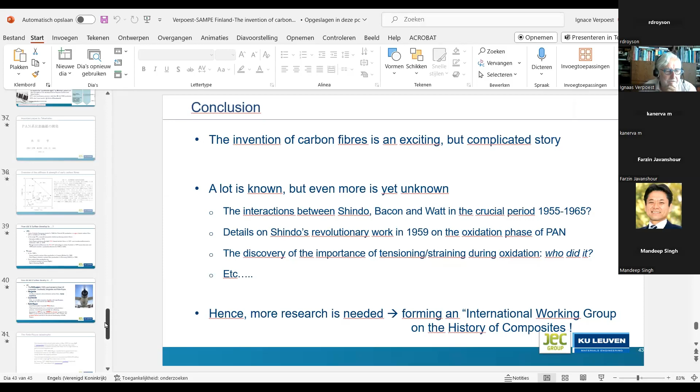Do you see the full screen now? Yes, we can. Everything is okay.

The title of the first part of my lecture is The Invention of Carbon Fibers, an Exciting History Asking for Further Exploration.

On the website of JEC World, the URL is shown at the bottom of the slides, you can see a kind of timeline for the development, or the history, of composites, which was made when I wrote this booklet on the history of composites. Two volumes have now been published by JEC World, and you can find an online version of those two booklets on the same website shown below.

I'll be very brief, just glancing over the history of composites until carbon fibers were invented. Long before our time, before the time of the Egyptians and Romans, we see that the composite concept already existed: reinforcing bricks with straw, impregnating papyrus fibers with a kind of asphalt.

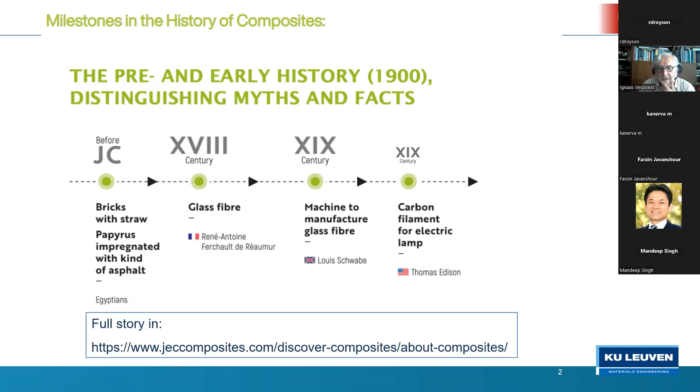The first moment we read about carbon filaments for electric lamps is linked to Edison, but I'll come back to that at the end of the 19th century. I'll show that, in fact, already before Edison, some people had the idea of making carbon filaments.

Then in the 20th century we have the invention of the first man-made resin, phenolic resin, by a Belgian guy, Leo Baekeland, who at that moment worked in the US. Two of his collaborators then filed a patent six years later, which, as far as I could reconstruct, is the first patent defining the concept of a composite material—namely a polymer, in their case phenolic resin, reinforced with textiles, initially linen textiles.

Even more surprising, already more than 100 years ago, in 1916, there was a very interesting patent describing the construction of an airplane fully built out of composite materials, as described by Robert Kemp in his patent. More details can be found in the booklet I wrote for JEC, on the JEC website.

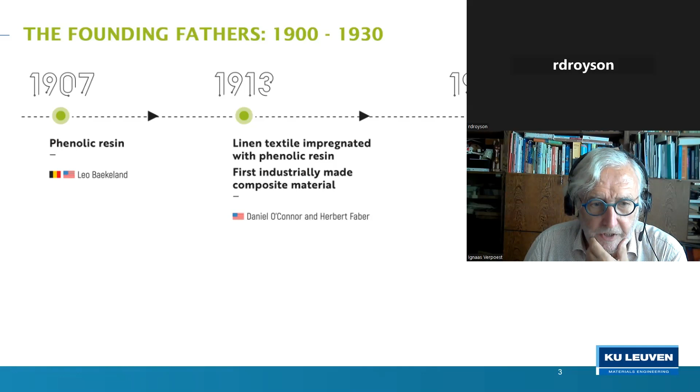Then in the 1930s we have three important inventions. Polyester was invented in the early 1930s, epoxy resins a couple of years later, and then the first production of continuous glass fibers usable for reinforcement of composites was done by Slayter Games in the US, a collaborator of Owens Corning, in 1938.

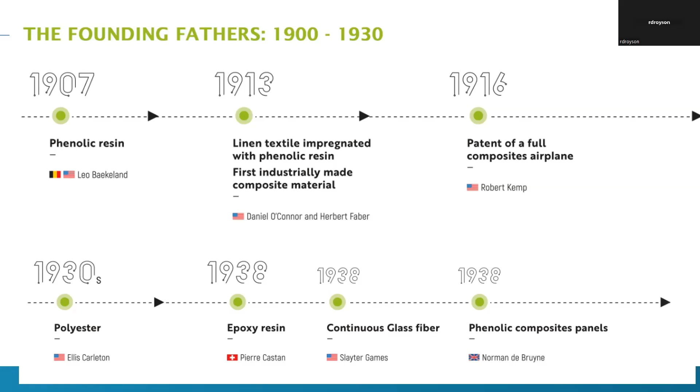At the same time, in the UK, Norman de Bruyne was making the first composites using phenolic resins, but with natural fibers. Then came the Second World War and the period after, where we see a strong development of glass fiber reinforced plastics for airplane components.

The manufacturing concepts of filament winding and pultrusion were already invented at that time. The first sports applications came with surfboards, the first automotive applications, and the first full aerospace applications—gliders—also appeared in the 1950s.

Then we come to what I call the second materials breakthrough, after the first one in the 1930s, which is related to carbon fibers. I'll come back to this scheme in a minute.

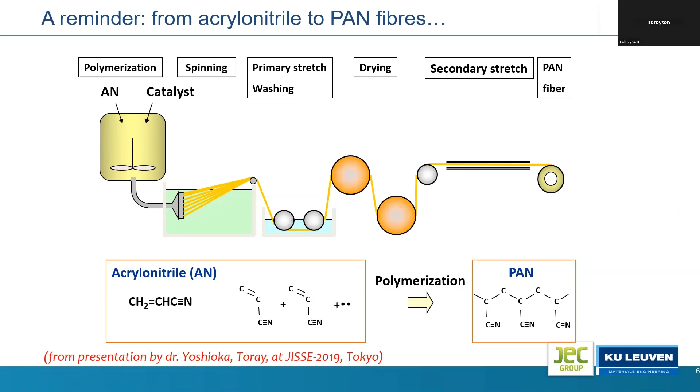Just to remind you how we make carbon fibers: at this moment, 95% or even 98% of all carbon fibers produced worldwide start from polyacrylonitrile. First we polymerize acrylonitrile, spin the fibers, stretch them a first time, dry them, and then stretch them a second time. This stretching is needed to achieve a kind of molecular orientation in the PAN fibers.

Then these PAN fibers go through the oxidation and carbonization process. If we want even more perfect carbon content, sometimes up to 99.9%, we add a graphitization process as well. Finally, a surface treatment protects the fibers and also improves adhesion with the matrix later on in a composite.

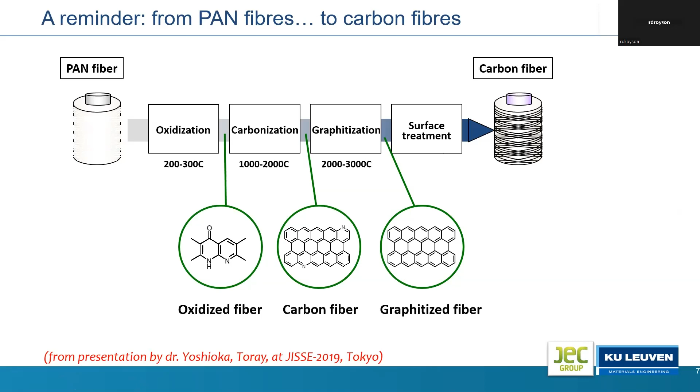Now, the question is, who invented the first carbon fibers? I already referred to Edison, but in fact, almost 40 years before Edison, there was a UK guy, Frederick de Moleyns. He was of French origin, and he had the first patent where he used powdered charcoal, which he heated between two platinum wires, and the charcoal started glowing and made light.

Joseph Swan then added two things. First, he was using a filament of carbonized paper, and second, he was doing that in an evacuated glass bulb, creating a kind of vacuum which would improve the durability of his invention.

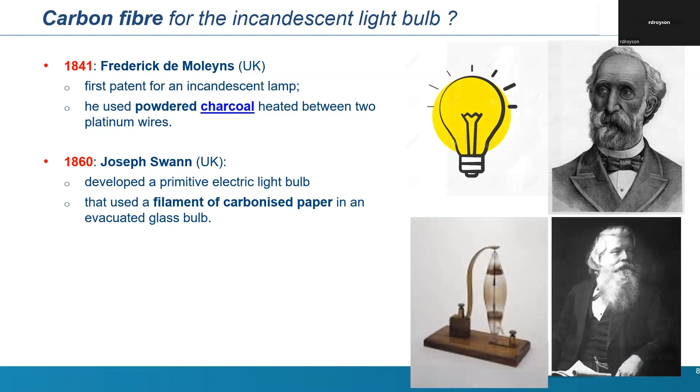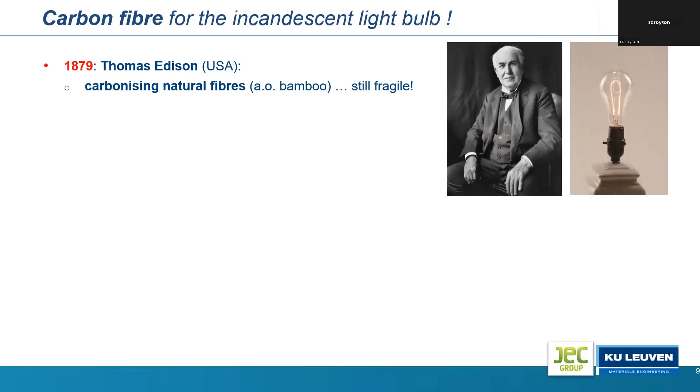Then comes Edison, and what Edison has done is bring this to an industrial level. He was not doing the initial invention, but he brought it to an industrial level by carbonizing natural fibers, amongst others bamboo. The problem was that these were still rather fragile, and it's interesting to see that Lewis Latimer,

he was the son of an African slave, was working as a technician for other inventors, amongst others in the group of Thomas Edison. He made a very big step forward in developing a more reliable carbon filament, because all these carbon filaments were very brittle, and he encapsulated it in cardboard. Again, I refer to my booklet on the JEC website for more details on this.

Unfortunately, by the beginning of the 20th century, this invention became obsolete because tungsten wires were then used in glass bulbs for making light. Then we go 70 years further. In between those 70 years there was a lot of research on carbon, but not so much about carbon fibers.

The first signs toward carbon fibers happened in the 1950s, where again natural fibers, amongst others cotton fibers but also rayon fibers, were used as filaments to replace tungsten. So they wanted to go back to the original idea of using carbon fibers, but this time in vacuum tube power amplifiers.

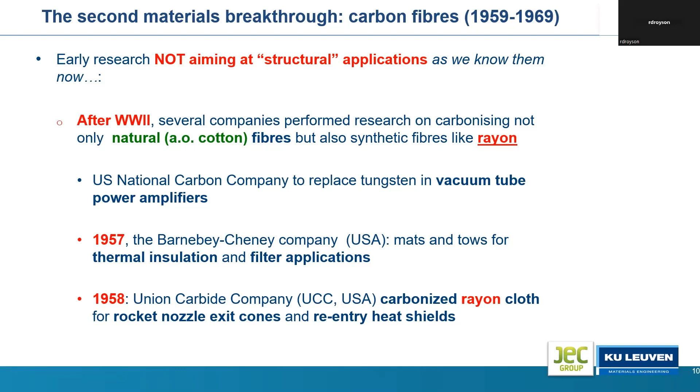So all these things were not really aiming at mechanical or structural applications, except maybe the last one, but that was again mainly for thermal reasons that these carbonous materials were used.

The first person who really looked for fiber-like materials was Roger Bacon, again at the Union Carbide Company Research Center, Parma Technical Center. He produced it by first sublimating carbon and then condensating it. Sublimation was realized by a high voltage arc between carbon rods, and then the sublimated carbon was condensated and formed a kind of fiber-like, on a nano level, fiber-like material.

Without going into detail, it's very exciting to read how they made a guess of the Young's modulus, reaching a Young's modulus of 700 gigapascal and an estimated tensile strength of 20,000 megapascal. At that moment, my understanding is that all of a sudden the carbon community started understanding that maybe the mechanical properties of these carbon fibers could become an interesting issue.

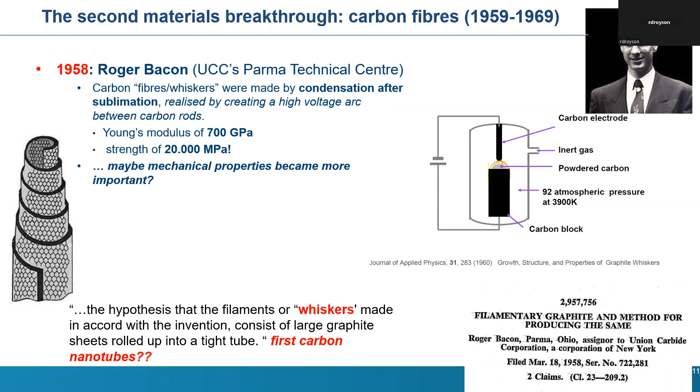You see here the patent of Roger Bacon. Some people claim that, in fact, these nanofibers of Roger Bacon, which were very short, can be considered as the first whiskers, carbon whiskers, and hence can be considered as the first carbon nanotubes, which in fact were only officially discovered in Japan in the 1990s.

A similar attempt to make carbon fibers, but now not carbon nanofibers like Bacon's, but real fibers which you can handle, was done by William Abbott at the Carbon Wool Corporation. He was carbonizing rayon fibers, but at very low temperatures, below 260 degrees. As a consequence, they were not really focusing on mechanical properties—the mechanical properties were very low and the carbon yield was only 50%, whereas now we reach much higher values.

So this is the development at Carbon Wool Corporation.

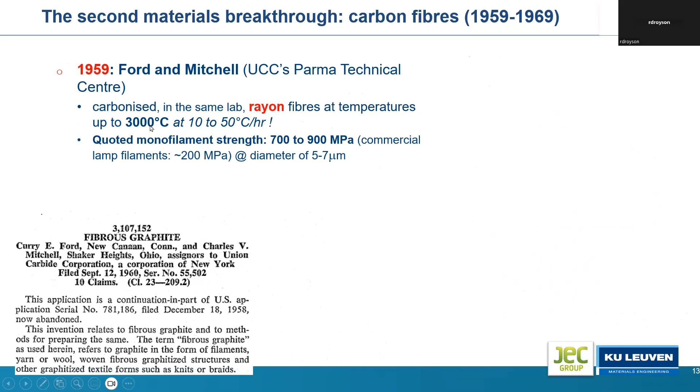Then we go back to Union Carbide, and in the same group as Bacon, Ford and Mitchell improved the previous approach of Abbott, who only was heating up the rayon fibers to 260 degrees. They were doing it up to 3000 degrees, and they were reaching monofilament strength of up to 900 megapascal.

The interesting thing in this research is that, as far as I could reconstruct, for the first time a link was made between the orientation of the graphitic layers in the carbon fibers and the mechanical properties. You see in the text that they measured this by X-ray diffraction, and they say a high degree of preferred orientation exists throughout the entire filament. It is believed that this high degree of uniformly oriented crystallinity in part accounts for the superior strength of the monofilament. So this is, as far as I could reconstruct, the first time this link was made between the structure of the graphitic layers and the high mechanical properties.

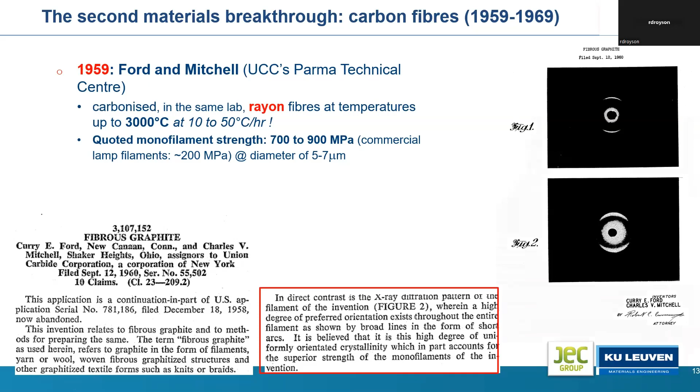Anyway, the American Chemical Society claims that the real inventor of carbon fibers should be considered Roger Bacon, with his carbon whiskers, and then later Leonard Singer, who started the commercialization—but I will come back to that. So we have carbon fibers. It was shown in America that they have interesting properties, but there was not at all any commercial production, and all these fibers were discontinuous fibers and so on.

And then comes Akio Shindo in Japan. He joined the Government Industrial Research Institute in Osaka in 1952 for studying carbon and, in fact, degradation of carbonous materials for nuclear reactors. He said that what he was interested in was development of industrial materials, not so much just the degradation of carbon fibers.

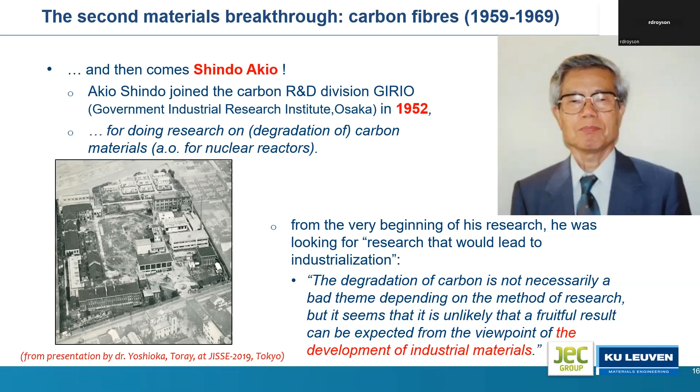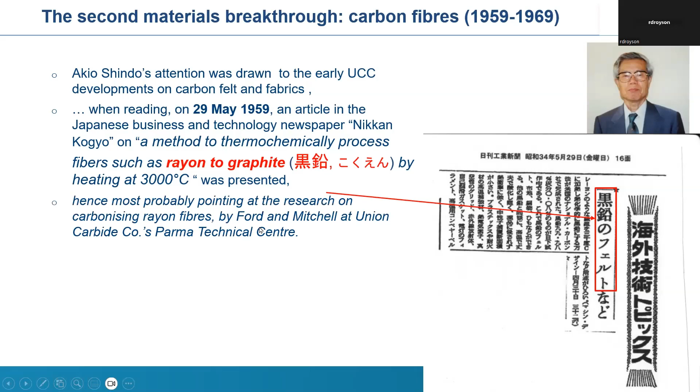Now, that story is for people who are interested in how science and technology develop, in fact a very interesting case. It's very well documented now by a lot of research in Japan that on May 29th, 1959, there was an article in a Japanese business and technology newspaper, Nikkan Kogyo, which referred to a method to thermochemically transform fibers such as rayon into graphite, kokuen as it's said in Japanese, by heating them to 3000 degrees. Here you see an image of that famous newspaper article of 1959. Because it refers explicitly to 3000 degrees C heating, my guess—though there is no solid proof—is that that article referred to carbonizing rayon fibers the way Ford and Mitchell had been doing it at Union Carbide.

This inspired Akio Shindo to refocus his research from degradation of carbon for nuclear applications to using polymeric precursors—maybe not rayon, but others—to make carbon fibers the way it was reported to have been done in the United States. Only three months later, and that's really amazing, he already filed his patent. For people who have been filing patents, and I have a few of them, this is an unbelievably short time—from the start of the idea of 'I could do that' until the filing of the patent, it took him only three months. I find this a textbook example of careful observation during experimental work that can lead to important scientific breakthroughs.

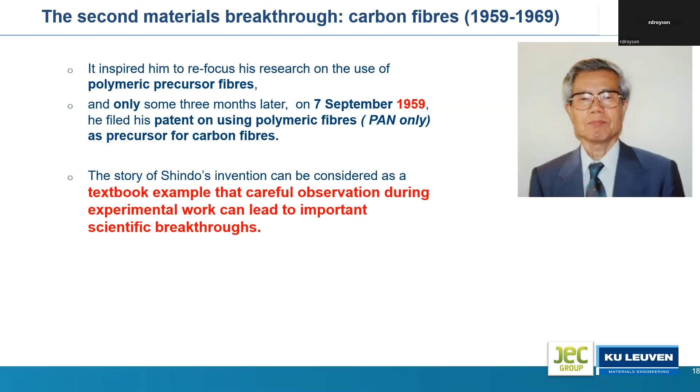And I will take a few minutes to take you through this invention of Shindo. He said, okay, I need good fibers, and I will try different types of polymeric fibers to make carbon fibers out of them. He finally ended up with DuPont's polyacrylonitrile fibers, the Orlon fibers. He took one single fiber and put it in a tube, flushed it with nitrogen to get rid of the oxygen as much as possible, heated it up to 1000 degrees, and after a few trials he had a non-brittle carbon fiber. He writes in his report: it did not fracture when you wind it around your finger.

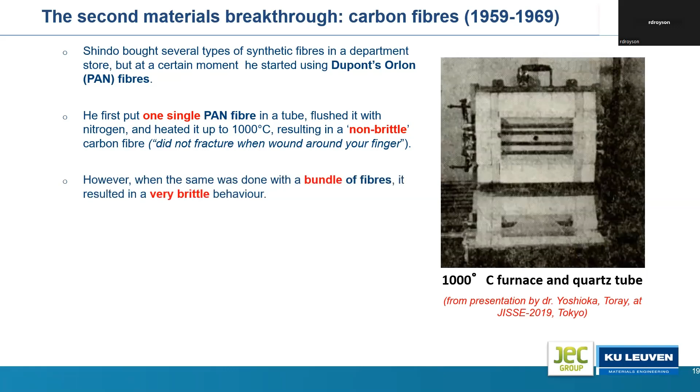Then he said, okay, one single fiber is not enough—let's take a bundle of fibers doing exactly the same thing. The bundle of fibers resulted in brittle behavior. So he started asking, why would that be? In his thinking, it could be related to the amount of oxygen remaining in the tube he had flushed with nitrogen. That amount of oxygen might have been sufficient to create a partial oxidation of the single PAN fiber, and hence stabilize it, because oxidation of polyacrylonitrile fibers results in thermal stabilization, making the fiber heat resistant so it can withstand higher temperatures for carbonization—whereas there was not enough oxidation, not enough oxygen available for oxidizing all the PAN fibers in a bundle. Hence he discovered that the oxidation process is the critical step in the production of carbon fibers.

And by this very careful observation of what happens during a simple experiment, he laid the basis for one of the most important material revolutions of the 20th century.

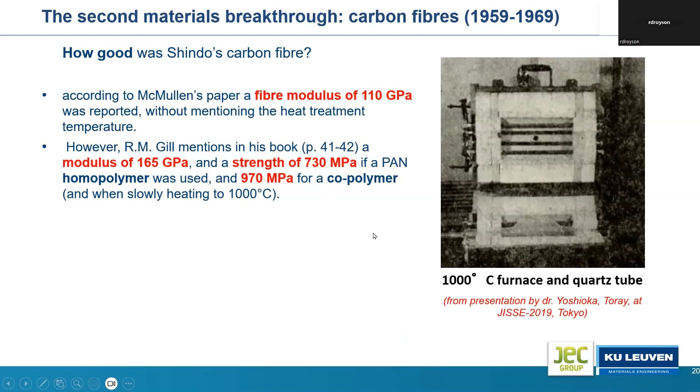Now, the question is, how good was Shindo's carbon fiber? Well, there are different sources and they contradict each other somewhat. Some talk about a fiber modulus of 110 gigapascal. R.M. Gill, in his book, mentioned 165 gigapascal and a strength which, depending on the type of polymer used, was between 700 and almost 1000 megapascal.

And then Johnson refers in a book by Watt that Shindo could increase the modulus of the carbon fiber from 110 to 160 gigapascal by increasing the carbonization temperature from 1000 to 2000 degrees C.

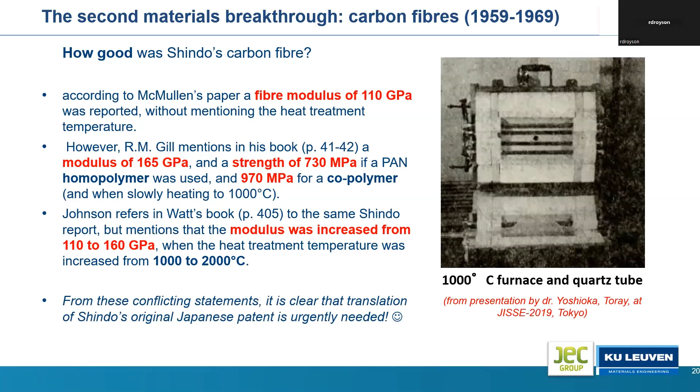I think we need, and I have in the meantime had some progress on that, a translation of the original Japanese patent. I now have it and will study it further.

Okay, how did it then go further? Well, we can say that Shindo's patent of 7 September 1959 was in fact the patent which created the way to make carbon fibers based on polyacrylonitrile fibers. He presented his results at a domestic conference in '59 and published his famous report in 1961, where he describes the whole process in quite some detail.

He also published several papers in Japanese journals, and he defended his PhD, which was translated into English. He then presented these results again two years later, in 1963, and you'll understand in a minute why 1963 is important. In 1963, he presented his invention at a conference of the American Carbon Society in the US.

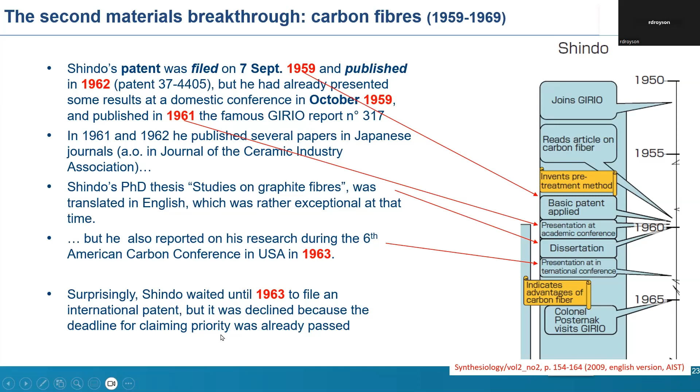So he also waited, but that's a small remark, until 1963 to file an international patent, but the priority date had already passed, so that was not accepted.

Anyway, we now have a way of making carbon fibers from PAN precursors, and the question is, what did other people in the US and in the UK do to invent or further improve that invention?

In the UK, it's very interesting that during a discussion in the Royal Society in London, William Watt mentioned to Tony Kelly, Sir Anthony Kelly, one of the big names in composites who died a couple of years ago, that he could make stiff graphite fibers. You can read this statement in a paper by Tony Kelly.

And they indeed started doing it, and they could reach stiff carbon fibers with stiffness up to 375 gigapascal by applying tension during the oxidative stabilization process of the PAN precursor — and that's important. They filed the patent in 1965, and here you see Phillips, Watt, and Johnson, the three co-inventors in the United Kingdom.

In the US, we have Roger Bacon, who, after his work on carbon whiskers, collaborated with his people at Union Carbide. They already started, also one year after the UK people, studying the effect of straining the fibers during processing, during the carbonization process. But they were still hooked on rayon-based carbon fibers.

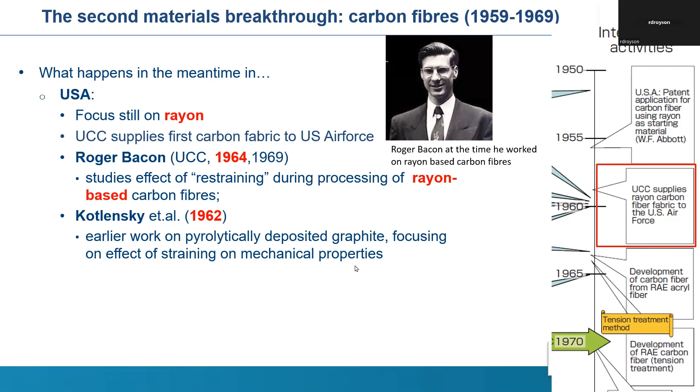Now, why is this so important? This is the second-to-last part of my presentation. We now know very well that the orientation of graphitic molecular units, and hence the higher mechanical properties, depends on that orientation — so orientation is very important for achieving high mechanical properties.

And this can be achieved, as we all understand now, by applying tension, straining, or restraining during the oxidative stabilization process. The question is, who came after the initial invention of making carbon fibers from polyacrylonitrile and made this crucial second step? Because understanding the relation between straining during stabilization, the orientation of graphitic molecular units, and the high mechanical properties is now considered the crucial second step in the invention of carbon fibers. The question is, who was first to come up with this link between graphitic orientation, mechanical properties, and the oxidative stabilization process?

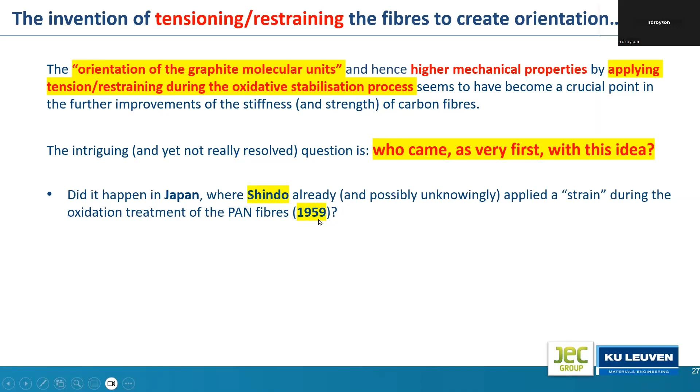Was it Shindo, who in Japan, in his first invention, unknowingly in a way was already applying strain during the oxidative treatment of polyacrylonitrile fibers? I'll come back to that. Or was it in the UK — Watt, Johnson and Phillips — who deliberately looked at the effect of straining PAN fibers? Or was it Kotlensky, and later Bacon, who also studied the effect of straining on mechanical properties?

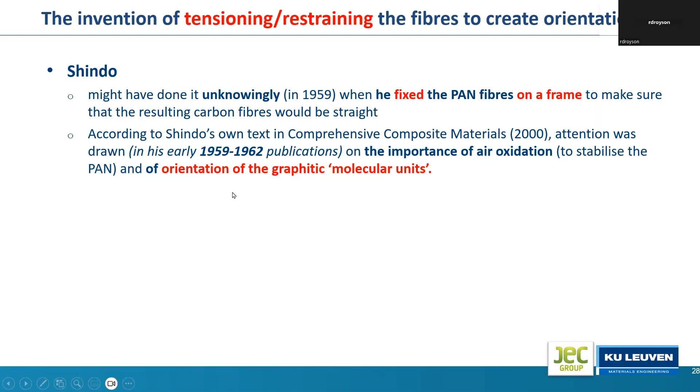Looking very quickly through it, if you read attentively what Shindo has been doing, he fixes the PAN fibers on a frame to make sure the fibers stay straight during the oxidation and carbonization treatment. But he mentioned in one of his papers that not only air oxidation is important, but also the orientation of graphitic molecular units. He was aware that during his process, where he restricted the length of the PAN fibers, as they are oxidized and carbonized, the volume of the material decreases, creating a tensile force during that process. He understood already that this could create orientation of the graphitic molecular units. So that's one school that says yes, Shindo has also had that idea.

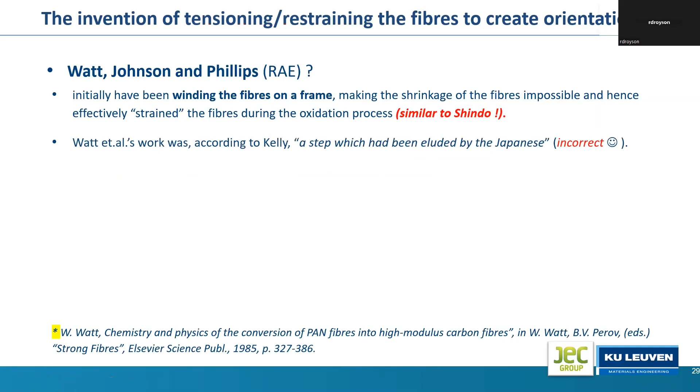The other school says no, it's Watt, Johnson and Phillips at the Royal Aircraft Establishment. They were basically doing initially exactly the same as Shindo, winding fibers on a frame. But then, as Kelly says, they actively strained the PAN fibers during oxidation, which was not done by the Japanese - though, as I explained, that may be an incorrect statement. In their patent documents they state explicitly that the effect of restraining PAN fibers from shrinking during oxidation on both stiffness and strength is convincingly shown as a function of carbonization and graphitization temperature. They were aware this was important, and by doing it more systematically, they reached a stiffness of 400 gigapascal.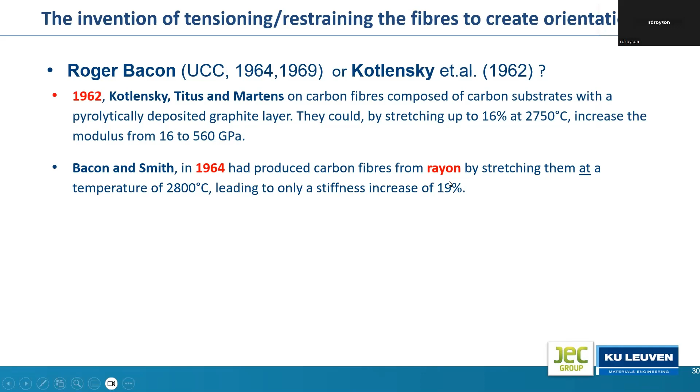And then there is Bacon and Kotlensky. Kotlensky already in 1962 did some initial research, but they were straining at the carbonization and graphitization temperature. In fact it was Bacon and his collaborator Smith who in 1964, almost exactly when Watt, Johnson and Phillips in the UK were doing their experiments on straining, also started stretching at a temperature of 2,800 degrees. That was not very effective. Five years later they published and filed patents saying you have to stretch during the heating, meaning during the oxidation phase, and then you can increase the stiffness up to 450 gigapascal. So for being effective, the stretching in rayon-based carbon fibers must happen during oxidation - they still were working with rayon-based fibers, so they needed somewhat higher temperatures than for PAN fibers, but that's a detail.

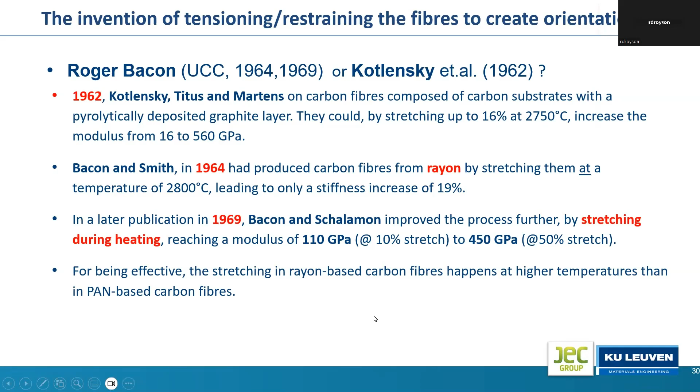So the conclusion is that Shindo was aware of the importance of some stretching during oxidation and stabilization, but the first who really studied that systematically were Watt, Johnson and Phillips. The question is, were they aware of what Shindo had presented? I'm searching whether Watt, Johnson or Phillips were present during Shindo's presentation at the American Carbon Conference in 1963, because then it would be logical that immediately after that they started their own research. And were the UK people aware of the developments by Kotlensky and Bacon? More research is needed to find out how all this developed - this awareness of the importance of stretching during the oxidation and stabilization phase.

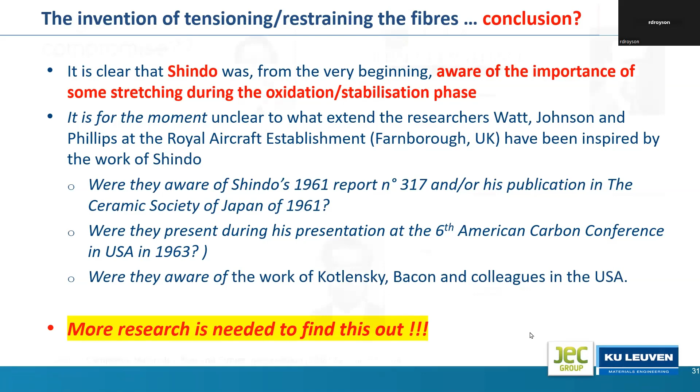So, who has been inventing carbon fibers? My idea would be it's Akio Shindo - he really started it in the earliest way. But on the other hand, Roger Bacon also played an important role, and William Watt, together with Johnson and Phillips in the UK, also played a role. So the University of Delaware, when they awarded their Medal of Excellence in 1987, made what we call a Belgian compromise and gave the Medal of Excellence to all three of them.

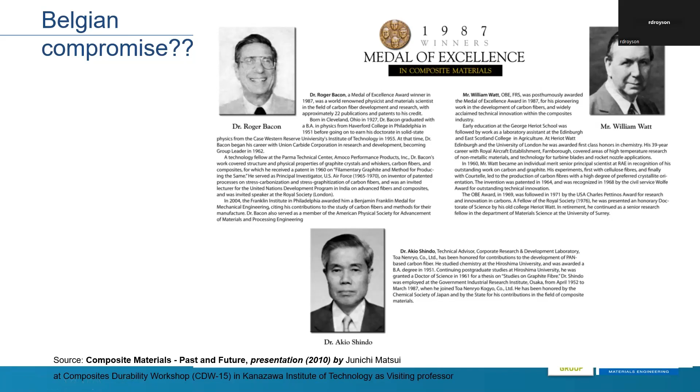So finally, I will spend a few minutes explaining what happened after these two important developments - the invention by Shindo on one hand, and the invention at several places, more or less simultaneously, of the importance of stretching during the oxidation phase. In Japan, Shindo was signing research contracts with Nippon Carbon, and they brought carbon fibers to market already in 1961. So Japanese companies were the very first to bring carbon fibers to market. Tokai Denkyoku had a similar agreement with Shindo.

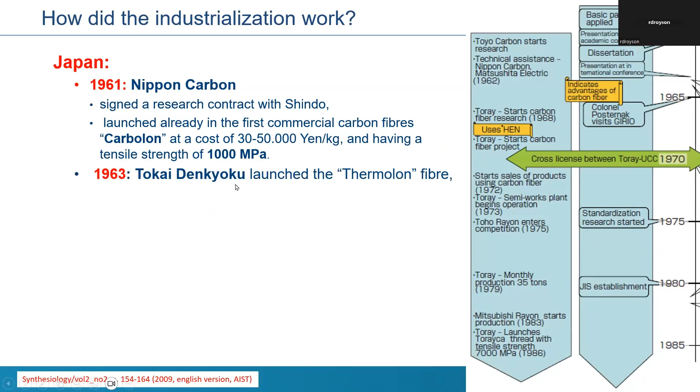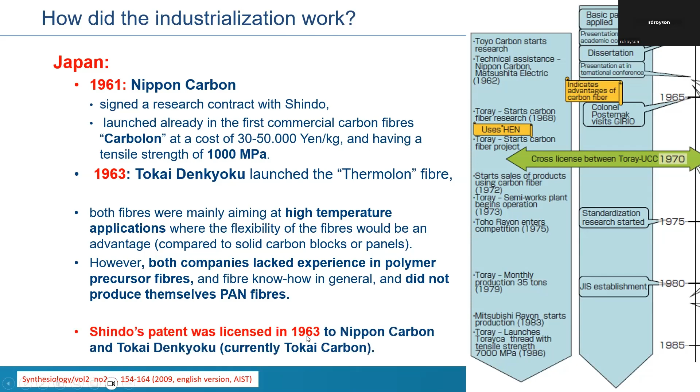They commercialized the Thermolon fiber. Both fibers were not so much intended for high mechanical properties, but for high temperature applications, where these fibrous structures and their flexibility were more advantageous compared to solid carbon blocks or solid carbon panels. But both companies, Nippon Carbon and Tokai Denkyoku, had a problem in that they lacked experience in polymer precursor fibers and did not produce the PAN fibers themselves. Shindo licensed his patent to those two companies, but the major breakthrough came a couple of years later.

You have to realize that in the meantime, some production was going on in Japan, but Toray was standing a little bit aside until the moment they started production of nylon 6,6 using aniline in an innovative process. Then they patented a new polyacrylonitrile compound, which they called HEN. They found more or less by coincidence that they could reduce the oxidation time, which was the time limiting factor up to then, by a factor of 10. At that moment, Toray decided that can be interesting.

They started carbon fiber development in 1968, so that's 6-7 years after Nippon Carbon and Tokai Denkyoku. In 1969, they start industrialization research, and they started production of their first batch type carbon fibers, 11 grams for a 1 meter bundle, in January 1970.

At that moment they saw, okay, we can do that. They obtained the practicable rights on the Shindo patent and all the rights on the developments which were done earlier by Nippon Carbon and Tokai Carbon. They started their continuous process pilot line in 1971, where they start the first T300. And in 1972, in Ehime, where still is the main plant of Toray in Matsuyama, they have a production of 5 tons per month.

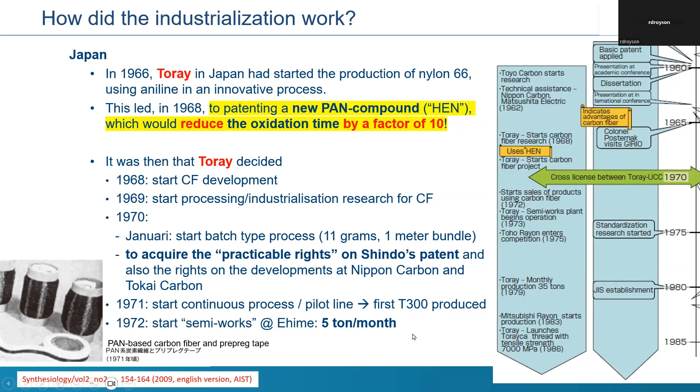In the US, they were still initially working on rayon-based fibers, that was not so successful, both in terms of properties and of carbon yield, of efficiency of the process. So finally, they turned towards PAN-based fibers, and they first got a license from a patent by Toho Rayon, and then Toray transferred their PAN carbon fiber technology to Union Carbide, the company where Bacon was working initially.

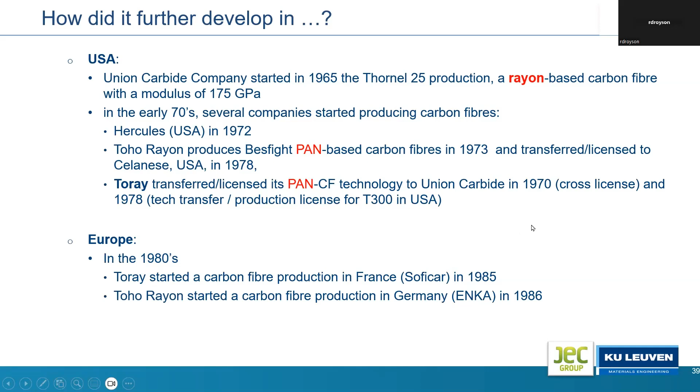And in Europe, also Toray and Toho Rayon started production, Soficar in France and Enka in Germany. And then in the UK, it's a very specific story. The patent from Johnson, Watt and Phillips was licensed to 3 companies.

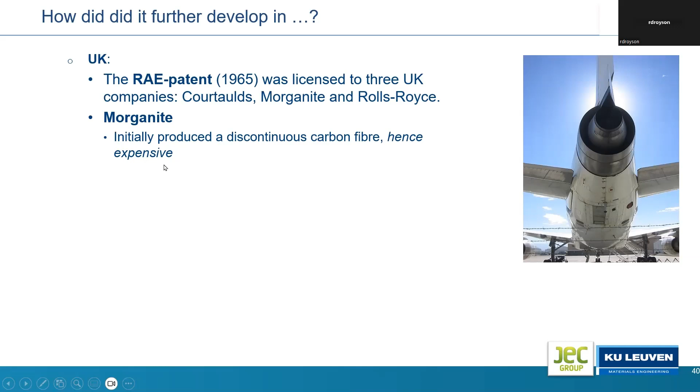Morganite produced initially discontinuous fibers - too expensive. And Courtauld, which is a textile company, were the first to continuously process PAN fibers, and then they sold these PAN fibers to Rolls-Royce, and they filed several patents. It's a very interesting story: they filed their patents not in the UK, but in all kinds of other countries, like Belgium, to keep it secret. But finally, they came up with very good carbon fibers.

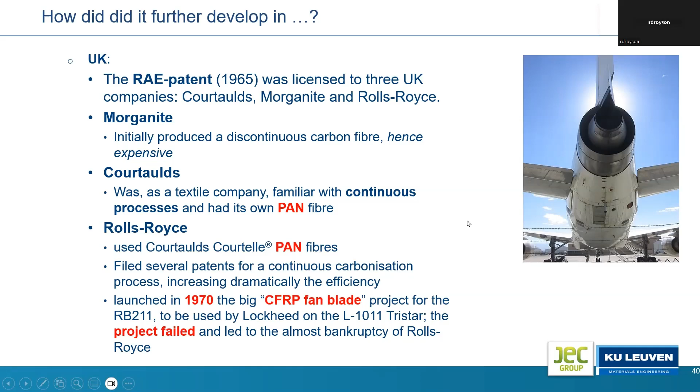They tried to make a carbon fiber fan blade for one of their engines, and that completely failed. That's almost a bankruptcy of Rolls-Royce, but also the end of carbon fiber manufacturing, more or less a couple of years later, in the UK.

As a conclusion, when you see this scheme I got from a very good paper, translated in English, a Japanese paper - in Japan from the very beginning there was a focus on carbon fibers based on polyacrylonitrile, based on the initial patent of Shindo. There were some initial developments by Nippon Carbon, but it only took off when Toray came into the scene and started producing their continuous carbon fibers in an industrial way.

They licensed this technology then to Union Carbide and some others. In the US, they were limited to rayon fibers, and that stopped in the early 1970s. And in the UK, there was also development based on polyacrylonitrile, based on the Royal Aircraft Establishment developments, but due to the bad luck of Rolls-Royce, these developments stopped as well.

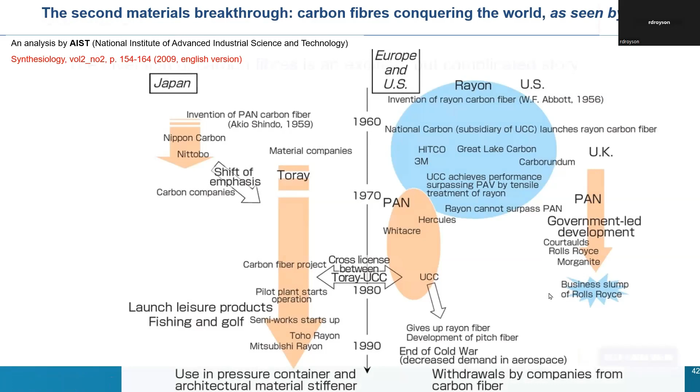So the invention of carbon fibers is an exciting but complicated story. A lot still is unknown: the interactions between Shindo, Bacon, and Watt in the crucial period 1955 to 1965, details on Shindo's revolutionary work, the discovery of the importance of tensioning and straining, who did what. Hence more research is needed, and I'm still dreaming of creating an international working group on the history of composites, and more specifically, the history of carbon fibers.

So thank you very much.

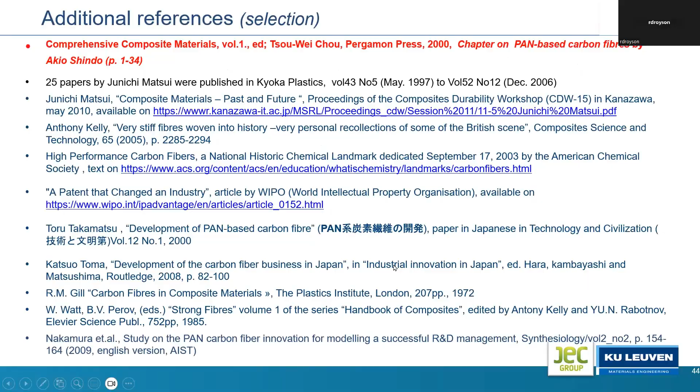In the paper in the booklet of JEC, you can find a lot of references, and these are the most important references on carbon fibers. So thank you very much.

Thanks a lot, Ignaas. If you are ready, I can ask a few questions from Professor Robert Joffe from Sweden.

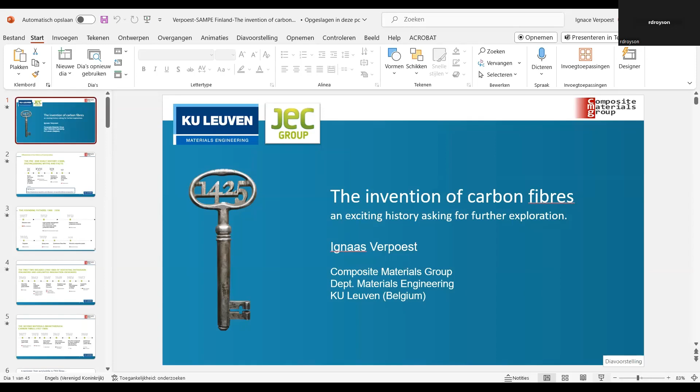So the first question is, I have heard and never seen about commercial isotropic carbon fibers. I am curious, what is the main application of such fibers? I guess non-structural. So if you want, you can answer this if it was clear for you.

What is meant exactly by commercial isotropic carbon fibers? I think they have been developed and were in a certain way isotropic when you take just rayon and carbonize it - you only reconstruct the polymer orientation already present in the rayon fibers, finding it back in a kind of orientation of the carbon fibers. But because you don't have this stretching during oxidation, you will not have a very well oriented graphitic structure.

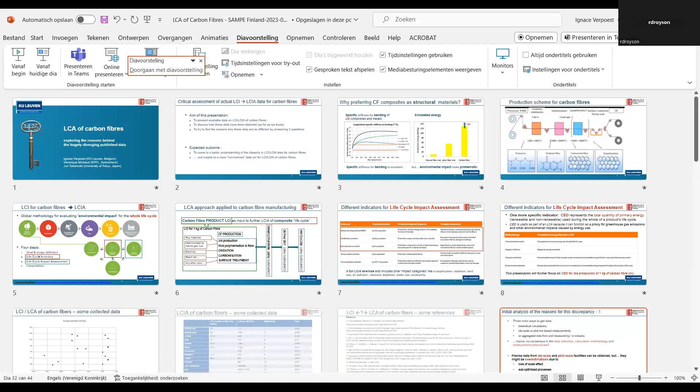Okay, so this is the next part of my presentation on LCA of carbon fibers, and I have given it a subtitle, Exploring the Reasons Behind the Hugely Diverging Published Data. I made this presentation and worked on this topic for the last 2 years, part-time, of course, being retired, together with Professor Véronique Michaud from the École Polytechnique Fédérale de Lausanne in Switzerland, and Professor Jun Takahashi from the University of Tokyo in Japan.

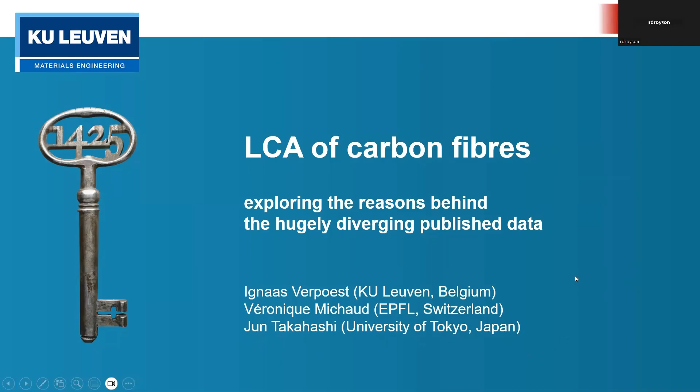So the aim of this presentation is to present available data on life cycle inventory or life cycle impact assessment of carbon fibers, to discuss how these data have been obtained, as far as we know, and try to find the reasons why these data are so different. And then the expected outcome of this presentation is to come to a better understanding of the differences, the disparity of these data for carbon fibers, and to maybe come to a more harmonized set of data for carbon fibers.

So just as a brief introduction, I always like this slide, which I made some 15 years ago together with my student, who is now CEO of the Reinforced company, Michael Collins. And you see here, this is the bending stiffness, specific bending stiffness, so corrected for density, for unidirectional composites compared to steel and aluminium. We see that steel is the lowest, then comes aluminium, then come glass fibers, then come natural fibers like flax, and at the end we have carbon fibers.

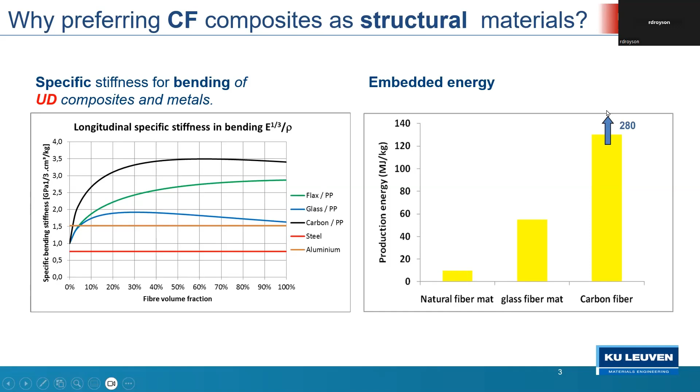So we see clearly that UD carbon fibers have a specific bending stiffness which is more than twice the value for aluminium and more than 3 times, almost 4 times, than for steel. But there is a but, and this is that as far as we understand, the embedded energy, as a metric for the ecological impact of carbon fibers, when you produce the carbon fiber, not when you use it, because then you make the structures lighter and you save energy, but just the embedded energy in the carbon fiber itself seems to be much, much higher than glass fibers and evidently much higher than natural fibers. But the question is, how reliable are these data?

You know how we make carbon fibers. In the meantime, I have shown that in the previous presentation. And if we now make a life cycle inventory and then a life cycle impact analysis of any material or any product, it has 4 steps. We first define the goal and the scope, then we make a life cycle inventory, then a life cycle impact assessment, and then the interpretation.

And so if we do this for the material extraction, and we limit it to that, excluding the production of a product and the packaging of a carbon bicycle, for instance, the use and so on, if we limit ourselves to the material itself, then we can first make a life cycle inventory, an inventory of all the materials which are used and their effect on the environment. And then we do an assessment of the impact using different parameters. And then finally, we make an interpretation, trying to understand the correlation and the importance of these different parameters.

Now, for carbon fibers, it's quite straightforward. First, we do a life cycle inventory. That means we do this for the raw materials, for the energy we need by heat or by electricity or steam, and any other input we are using. And then this is what we use as input in the production of carbon fibers: first the acrylonitrile, then the polymerization, the fiber making, oxidation, carbonization, surface treatment. That's what we call the life cycle inventory for 1 kilogram of carbon fiber.

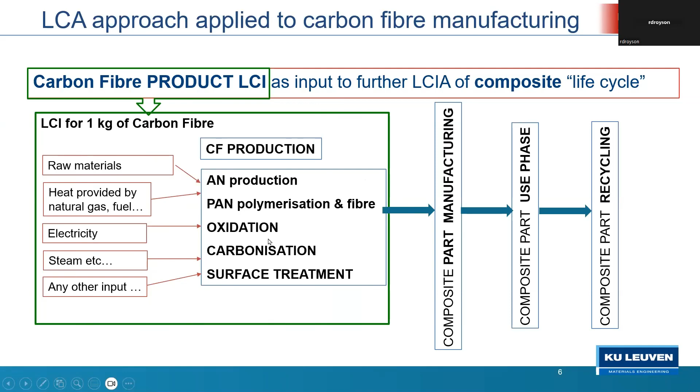And then we go towards composite manufacturing and towards the use phase, which is often much more important than the previous ones. I refer to publication by Professor Takahashi. And then we have the issue of recycling. I will limit myself in the discussion on LCA of carbon fibers, to that first part here in the green box.

Now, what are the indicators which we use to assess the environmental impact of a certain material? Well, first of all, we have the global warming potential measured in kilogram CO2 equivalent. Then the acidification potential measured in sulfur dioxide equivalent, and then the eutrophication potential, which is related to how much nitrogen is coming into the environment, which will impact the balance in nature, plant growth, and things like that.

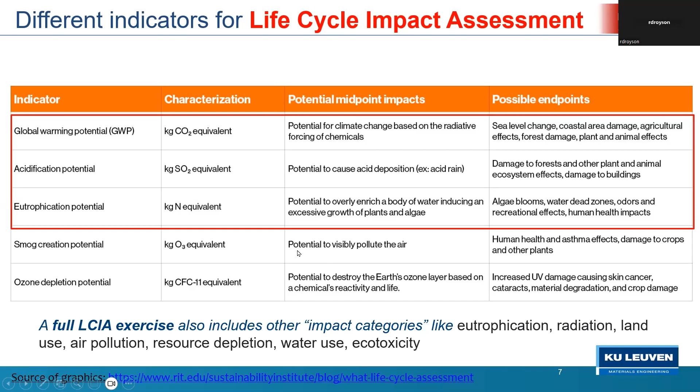A full LCIA exercise includes many more different impact categories: radiation, land use, air pollution, and so on. But we will limit ourselves to cumulative energy demand. The cumulative energy demand is the amount of energy which is embedded in a certain material, and it is accumulated during the extraction of the material, the production of the material, and so on.

And we will further use this cumulative energy demand as a kind of proxy also for greenhouse gas emissions and for other environmental impacts, although there is still a difference between CED on one hand and GWP, greenhouse gas emissions, on the other hand. But we will limit ourselves in this discussion to cumulative energy demand.

Now, if you look in the literature, and that's what I was doing together with Jun Takahashi and Véronique Michaud, we looked back into the 1990s, and if we look at all the data which we have produced up till this year, then we see a very, very large variety, a factor 6 difference in the data just for that simple metric, namely the energy demand for 1 kilogram of carbon fibers.

Now, why is that? Well, when we started this study, we had some assumptions, some hypotheses. We thought there are three main ways to get these data. You can do theoretical calculations: for each physical or chemical reaction, you can calculate the ins and outs of energy, some needing energy, some emitting energy, and so on. Or you can do lab scale or pilot scale based measurements, or you can measure data in industry, together with industry, in industrial production.

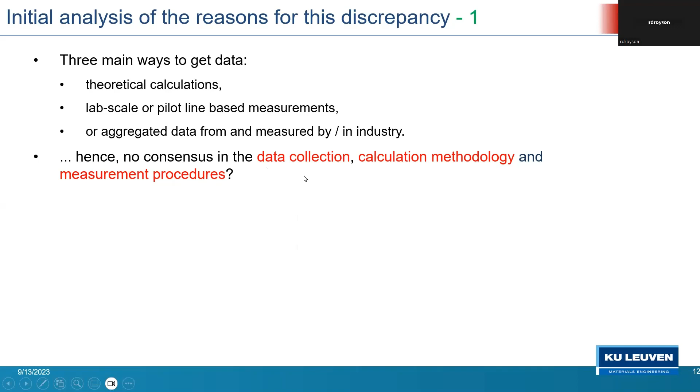So these are already three different ways of getting data for the life cycle inventory of carbon fibers. Hence, our hypothesis was that there is no consensus on how these data are collected, what is the calculation methodology, and what are the measurement procedures.

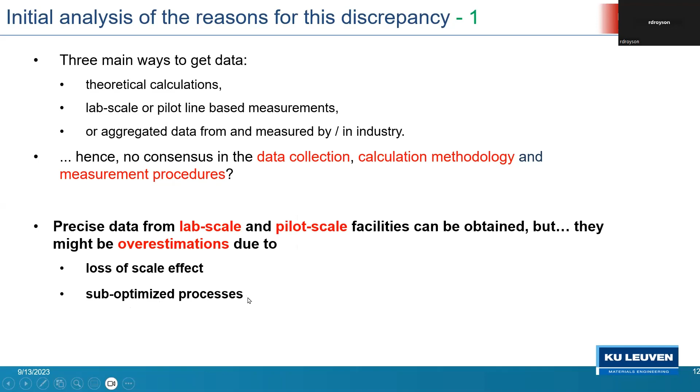Now, a second hypothesis is that there is a difference between lab scale and pilot line data on one hand, and data measured in industry on the other. It was our hypothesis that these lab scale and pilot scale data could be overestimations, and I will come back to that, due to a loss of the scale effect and due to the fact that lab scale and pilot scale facilities are sub-optimized processes compared to industrial processes.

And then there can be other types of things like system boundaries, type of process, and type of carbon fiber. I can tell you that the data I will deliver later on are all more or less for T300 to T700 fibers, and that the effect of the type of fiber is not that critical. Certainly for CO2 emission, not as much for the energy itself, it can be important whether you produce in Japan, the EU, the US, or China. That is mainly related to the fact that in all these countries we can have a different energy mix, fossil, nuclear, renewable, and that has a strong effect on CO2, not so much on the cumulative energy demand.

But maybe one of the most important things, and now I'm already anticipating our conclusions, is the energy flow in the factory. Many companies, just to save money, not to have a lower environmental impact, but just to save money, use their energy as effectively and efficiently as possible. Hence they are reusing as much as possible waste streams of energy in the same process or in other processes in the company. And that is something you cannot take into account when you only look at pilot plant or lab scale data.

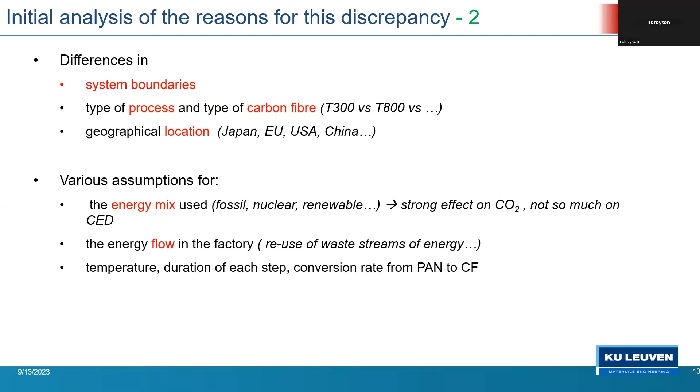And then, of course, there are different assumptions for the temperatures at which you oxidize and carbonize, the duration of each step, the conversion rate, and so on. So there are many, many reasons why these data could be different. And that was the goal of our mission, of Veronique, Junko, and myself, to try to understand where these differences are coming from.

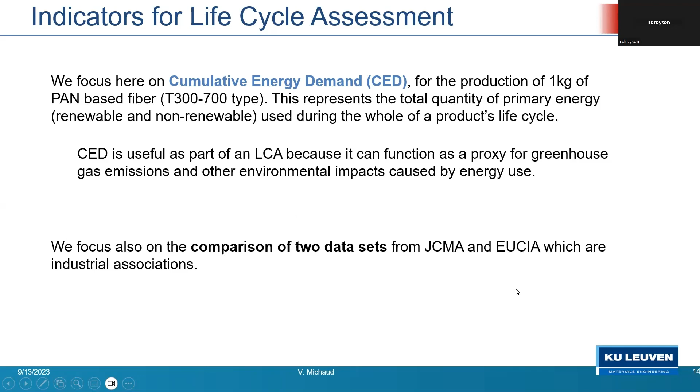So as I mentioned, we focus on cumulative energy demand. Out of all the data, we selected two important published datasets, because they come from two organizations which represent the carbon fiber or composite manufacturers: JCMA, the Japanese Carbon Fiber Manufacturing Association, and EUCIA, the European Composites Industry Association. Both have data on the environmental impact of carbon fibers, so we will focus on those.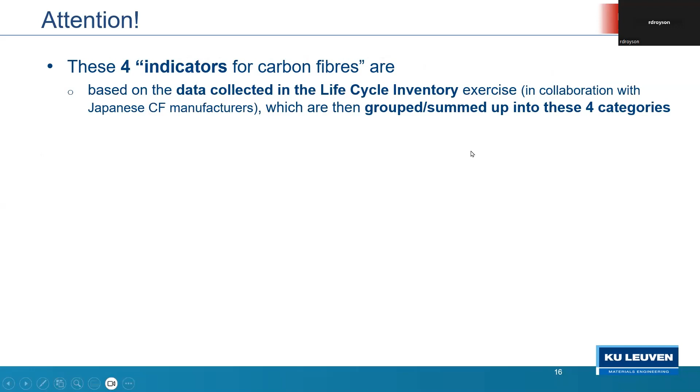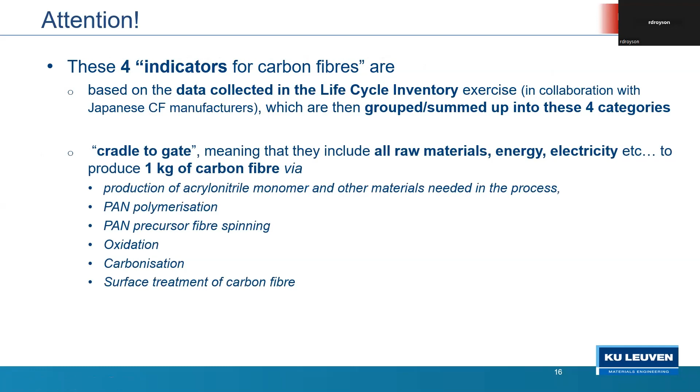These four indicators I showed—energy, CO2, SOx, and NOx—were in Japan based on data collected in the life cycle inventory exercise of JCMA, which took measurements from three different companies and grouped the data into these four categories. This is really a cradle-to-gate approach, starting from raw materials, with all the energy and electricity included, to come up to 1 kilogram of carbon fibers.

Then in 2018, quite a lot later, almost 15 years after the first data published by JCMA, EUCIA did a similar exercise. They came up with a cumulative energy demand of 770 megajoules. I remember the 286 of JCMA. Now, this is part of their report, and here you see the CED data, 771, and the CO2 emission, which was about 39 kilogram CO2 per kilogram of carbon fiber.

How did they get this data? Well, in our discussions with EUCIA, it became clear that they sought industry input but could not obtain it—the existing carbon fiber companies resisted giving their data. So they had to rely on literature and databases like EcoInvent. Funny enough, they also referenced one of our own publications, a very initial study from 2009, but that study was only based on theoretical assumptions and the same EcoInvent and other data—not experimental data at lab, pilot, or industrial scale. They also referenced a much-cited paper by Das in the United States from 2011.

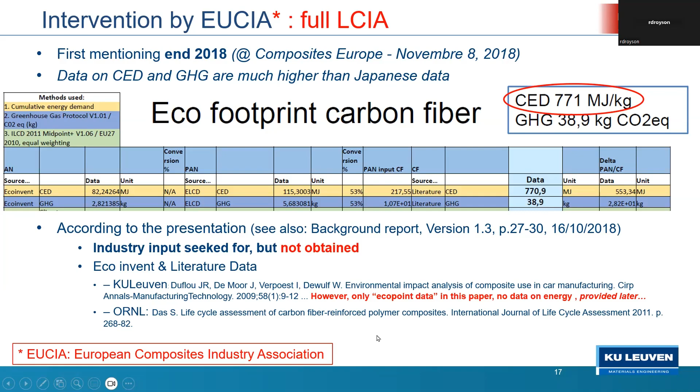Then two years later, they published a new calculation including some experiment-based data, but only at lab scale and pilot scale, produced by the University of Aachen and by ETH. They then came up with an even higher value, 1040 megajoules per kilogram, which in a later version was slightly changed to 998. So let's say about 1000 megajoules per kilogram of carbon fiber.

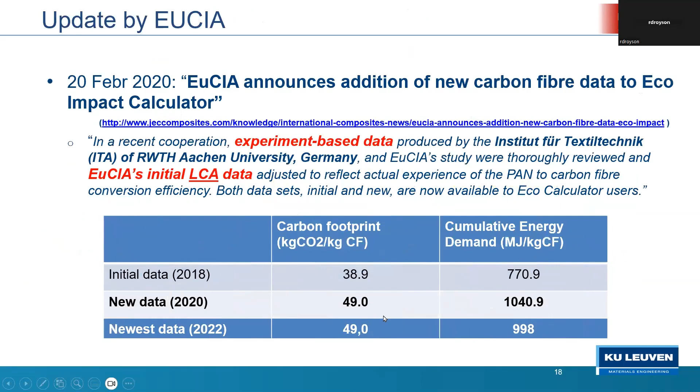Inspired by the discussions we had started with JCMA, they also came up with recalculated data—I won't go too much into detail. They included feedstock energy, and their number was 350 megajoules and about 20 kilogram CO2 per kilogram of carbon fiber. EUCIA, if I remember correctly, was quoting 49 kilogram of CO2, more than double.

So what is the situation we have? EUCIA is quoting a value of 1041, slightly decreased to 998, while JCMA has a value of 350 megajoules per kilogram. Why is there such a big difference? Let me make a comparison: if somebody sold you carbon fiber and said the stiffness was between 200 and 600 gigapascals, you wouldn't trust that, because such a big range of mechanical properties is unacceptable when designing a composite product. Well, we have exactly that situation with environmental impact. We know the true value must be somewhere between 350 and 1040, but that's still a factor of 3 difference between those two datasets.

At first sight, we thought a similar approach is used, and after some discussions, feedstock energy is now included in both. I should mention that since about a year ago, after my visit to Japan in September, we now have direct discussions, online discussions between people from EUCIA and people from JCMA, which is a real breakthrough.

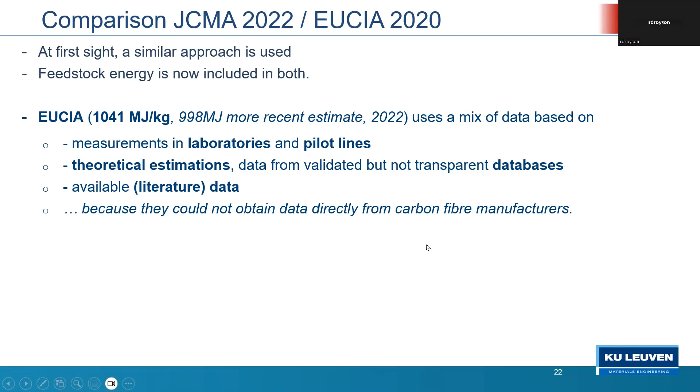At least they both collaborate now with us, with Jun Takahashi and Veronique Michaud, to clarify this problem. So EUCIA, as I said, about 1000 megajoule per kilogram. Their measurements are based on laboratory and pilot lines, on theoretical estimations, and on databases and literature data, because they could not obtain data directly from carbon fiber manufacturers, whereas JCMA uses data measured in three major carbon fiber manufacturing companies, Toray, Mitsubishi Chemical, and Teijin.

And they do these measurements following ISO standards. The data are then collected by independent experts and reviewed by them. These data were based on a total production of almost 7,000 tons of carbon fibers in 2017-2018. The aggregation is to respect confidentiality because the companies do not want to have their own data published as such, only as an average value for the three companies.

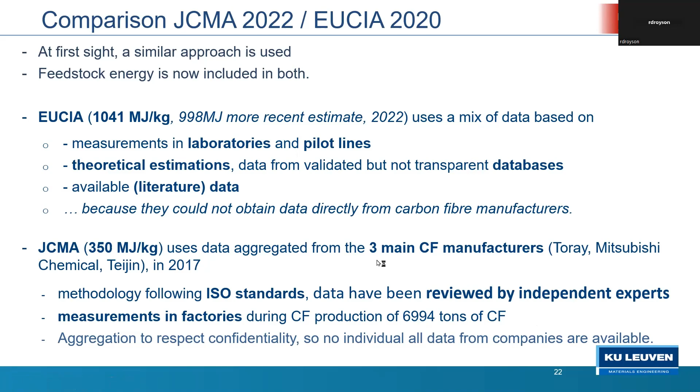But anyway, the way these data are measured and aggregated is according to ISO standards. So now that we know how these data are produced, what can be the reasons why they are so different? We have a few hypotheses. First, the conversion ratio.

EUCIA is assuming that you need about 2.4 kilogram of polyacrylonitrile for 1 kilogram of carbon fibers, whereas JCMA measures in their plants a conversion ratio of 2.1. Of course, it's in their interest that the conversion ratio is as low as possible, because the lower it is, the lower the amount of polyacrylonitrile fibers you need for producing 1 kilogram of carbon fibers.

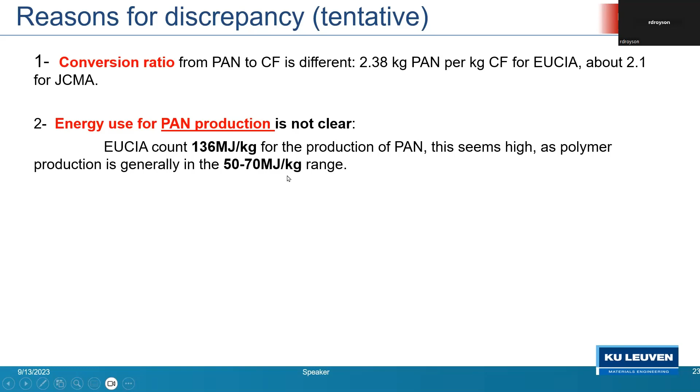Whereas we know, if you look in databases, that for polymers, the amount of energy needed for producing 1 kilogram of such a precursor polymer is between 50, 60, and 70 megajoule. So this is something which is not clear at all, and we are working on getting more detailed information.

A third reason why this is unclear is that EUCIA quotes that 820 megajoule of the energy needed for producing carbon fibers, both in the acrylonitrile, the PAN, and the oxidation and carbonization phase altogether, the electricity accounts for 820 megajoule and heat only for 170 megajoule. Whereas in the JCMA data, the electricity is only about 93 megajoule, 65 megajoule internal, 27 megajoule external, and the rest of the energy comes from fuel, natural gas.

Which is of course much more efficient, because if you first use fuel and gas to make electricity, and then you use electricity again to make heat, it's not a very efficient process. We have more data on that, but I just want to mention that the JCMA data use less than 30% of pure electricity energy, whereas the EUCIA data have more than 80%. Why this is like that and what is the consequence of that still needs to be clarified.

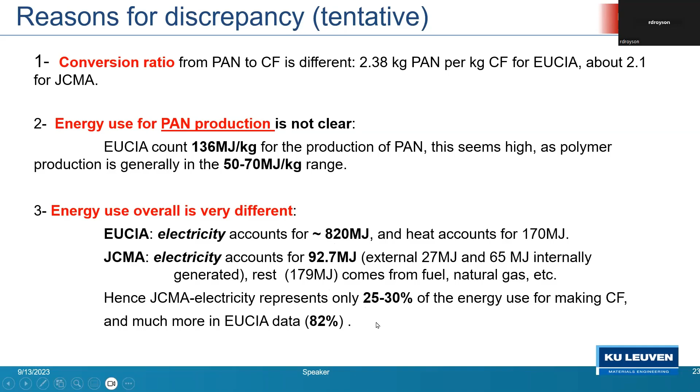And you end up with a value which is very close to the value in this JCMA data. The reason for that, this economy of scale, is of course the potential for heat recuperation in large scale production and the level of process maturity. The more you produce, the better you understand the production, the more efficient you can make the production.

So this is a fourth reason why there could be this big difference between the high EUCIA data and the low JCMA data. And then there is an unexpected independent voice which came up just a couple of weeks ago during the ICCM conference in Belfast, where Badr Moutik, who is a researcher at Plymouth University, made a kind of evaluation.

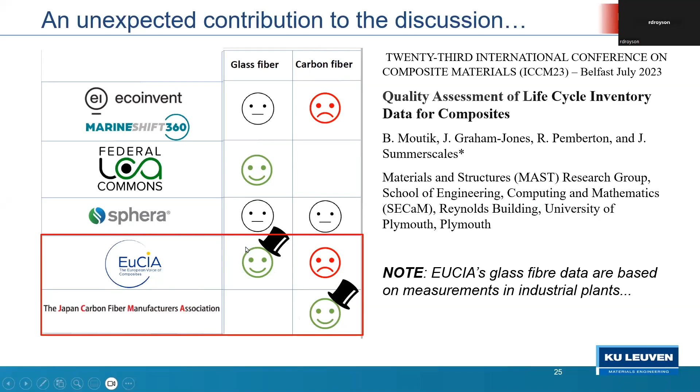So what we learn from this is that according to this independent quality assessment of LCA data, the data which seem to have the most trustful, the highest reliability, are data which of course follow the ISO standards, but who also are based on industrial input—the carbon fiber data from JCMA and the glass fiber data from EUCIA.

So our preliminary conclusion is that the industrial versus the lab scale data and the theoretical assumptions—this is maybe the main reason for the big differences in input data. And this is confirmed by this independent comparison by the people from University of Plymouth.

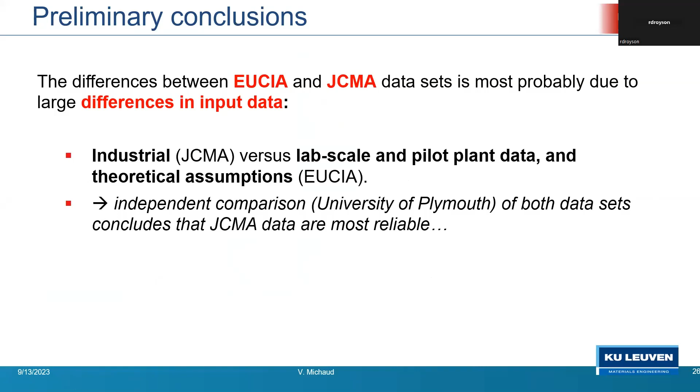And then a second unknown, which further needs clarification. A third one is the large difference in electricity consumption on one hand, and the difficulty to compare data sets for the PAN production itself. So these are our preliminary conclusions.

So there is no simply true data, but after our study, we assume—we believe—that JCMA data seem to be adapted for analyzing composite processes, the environmental impact of composite processes when you are using carbon fibers.

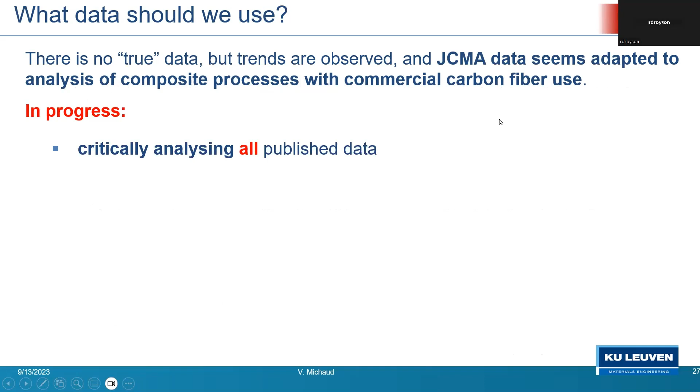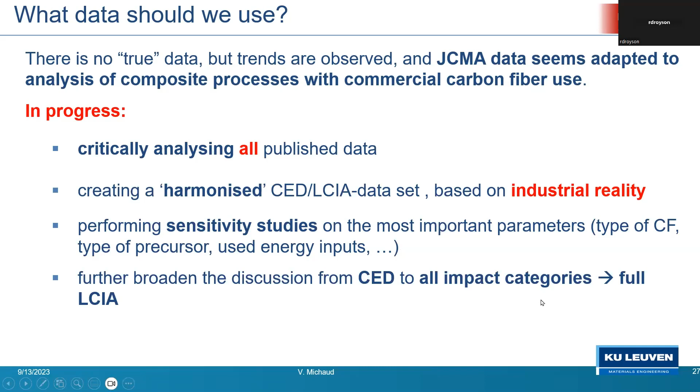What we are further doing now is critically analyzing all the published data, creating harmonized CED or LCIA data sets based on industrial reality, performing sensitivity studies we would like to do, and further broadening the discussion from CED to all the impact categories—greenhouse warming and so on, land use and so on.

And we are continuing our meetings with the interested parties for better comparing the data sets and better understanding these differences.